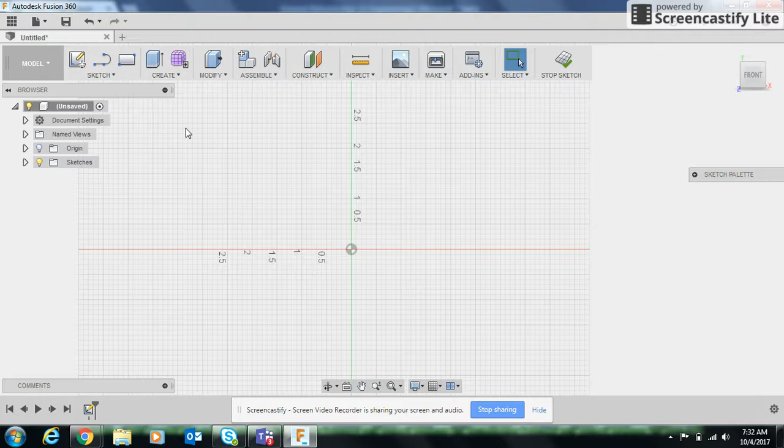Rectangular pattern video. You need to start your sketch, and we're starting with a 6x4 rectangle. I'm going to hit the R key and do a height of 4. I'll click the tab key and type 6 for my width. Then E for extrude out 0.5. So there's my first rectangle.

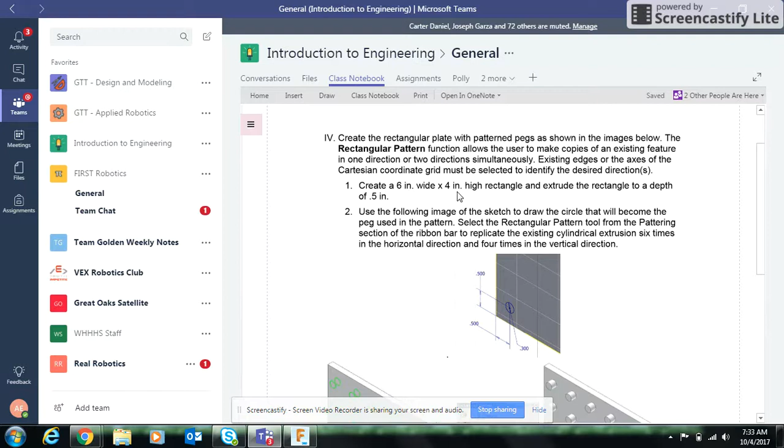If you look back at your directions, it tells you you're creating a 6x4 rectangle with a depth of 0.5. Now we're going to dimension this circle to be a half inch off of each edge, and it's going to have a 0.3 diameter.

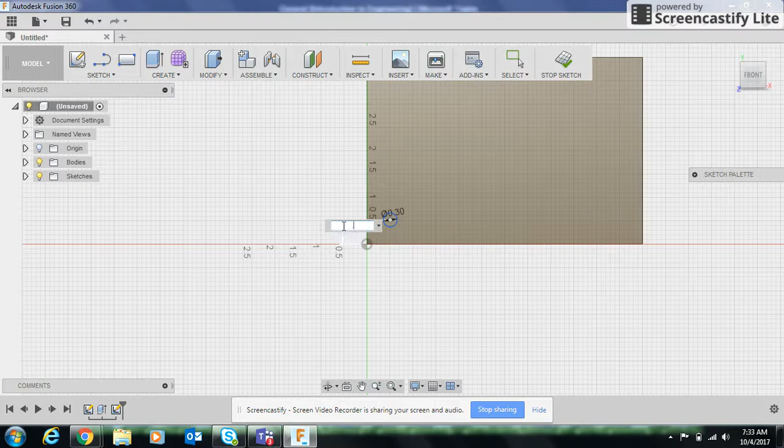So I'm going to create a center diameter circle on this face, click, drag, 0.3, enter. Then D for dimension, the bottom edge to the center, pull it over to the left, and type in 0.5, enter. D for dimension, the side edge to the center, pull it down, click, 0.5, enter.

So I've got my circle dimension, and now I'm ready to extrude it. The directions don't really tell you how far to extrude this, but 0.25 looks pretty good.

Now, since we're ready to rectangular pattern, I'm not using the patterning tool that's in my sketch. I'm not trying to pattern a sketch feature, I'm trying to pattern an object. So I'm going to use my create menu and go down to pattern, rectangular pattern.

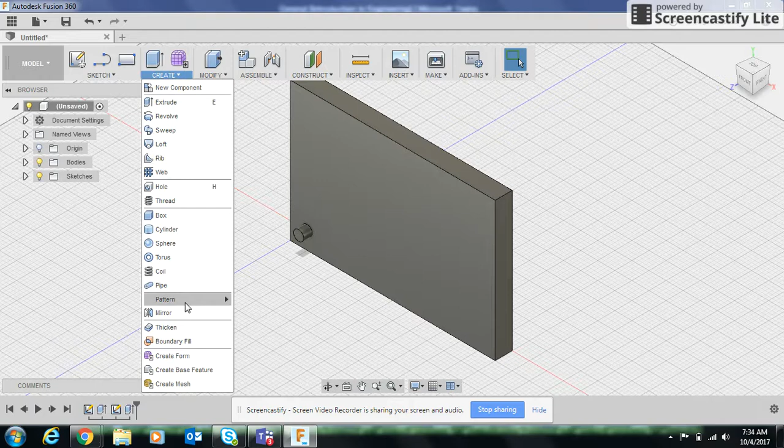For my object, I'm going to select this peg. For my direction, I'm going to select the bottom edge. Do you see how it's turning black? Click that bottom edge. Every 1 inch, I want there to be 6 total.

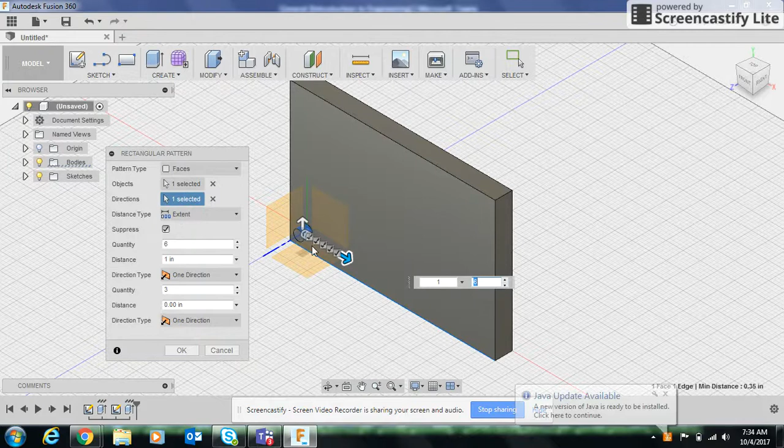Now notice in distance type, it's giving me extent. That's why it's putting all of my little check marks for my peg so close together. Change it to spacing. I want the spacing to be... notice how it changed to 0.2 because my extent was 1 inch, but I want my spacing to be 1 inch in between. That looks better. That should look more like the directions with the 6 pegs spaced out.

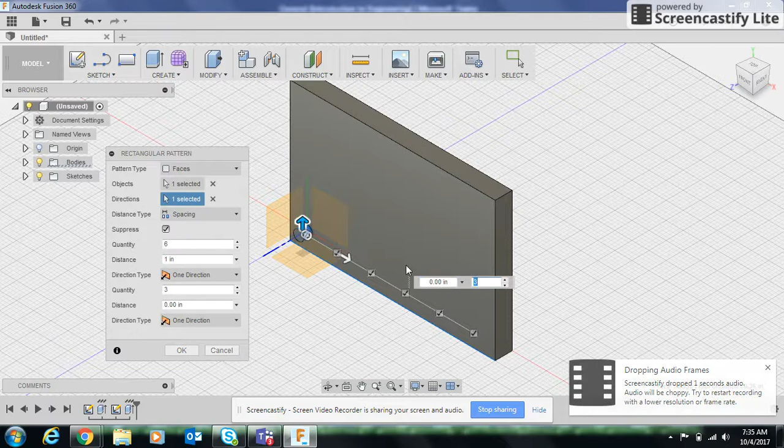So now that I've got my 6 pegs spaced out across the width, I'm going to click my up arrow, and every 1 inch, I want 4 pegs. This should look a lot like your example. Notice I'm doing 6 pegs every 1 inch, 4 pegs every 1 inch. Click OK, and done. This is it.

Make sure you save this in your IED 5.5 folder. So you should have an IED project 5.5 folder. Call this rectangular pattern. And you're done.